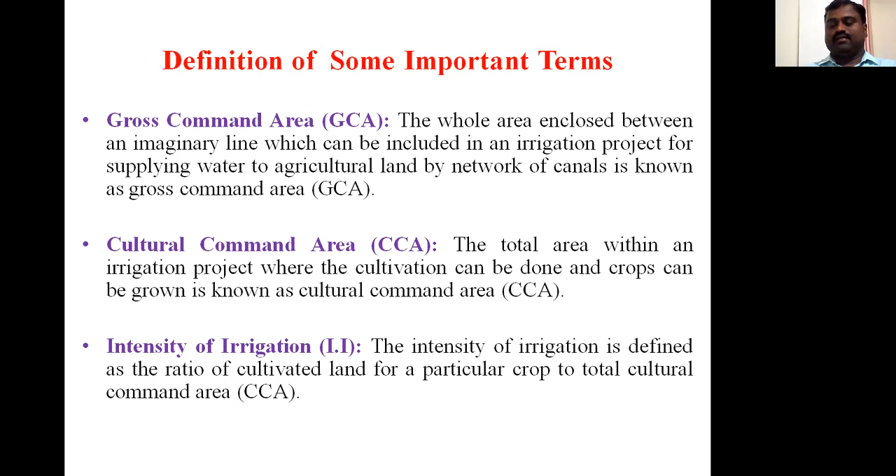Moving to next term, that is the time factor. This is the ratio between the number of days the canal has actually been kept open to the number of days the canal was designed to remain open during the base period. So when a canal is designed, basically it is designed to keep open for some days to supply water to agricultural fields during the base period. But practically, it is not kept open for the designed period. So this time factor is the ratio between the number of days the canal has actually been kept open to the number of days the canal was designed to remain open during the base period.

Last term we are having is crop factor or crop ratio. We have two seasons. One is Rabi season, other is the Kharif season. So this crop ratio is the ratio between area of land irrigated in Rabi season to the area of land irrigated in Kharif season. So these are some definitions of important terms.

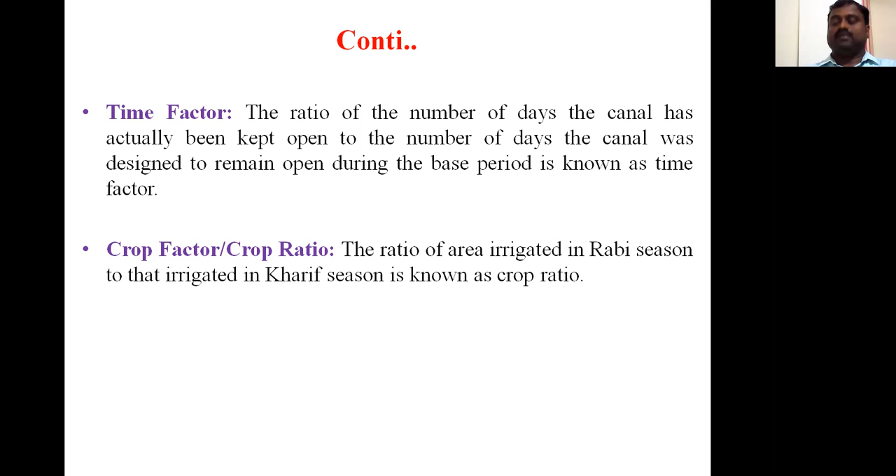Now let us move to next part, that is unlined and lined canals. Regarding these two types of canals, we already had gone through them in session 1 in case of canal types. So let us take again unlined and lined canals here. Unlined canal is a canal which is constructed without the impervious thick layer on the channel bed and the sides or banks. So therefore, in unlined canals, more seepage loss can be expected. And these canals are generally constructed with natural sides, so they are designed with low velocity to protect the canal section from scouring.

Moving to lined canals, these are the canals provided with the thick impervious layer at the channel bed and banks. So in this canal type, seepage loss will reduce to some extent due to provision of the impervious layer. And such canals are designed with a higher velocity, giving reduction in the cross-sectional area, as the lining is provided at the bank and bed of the channel.

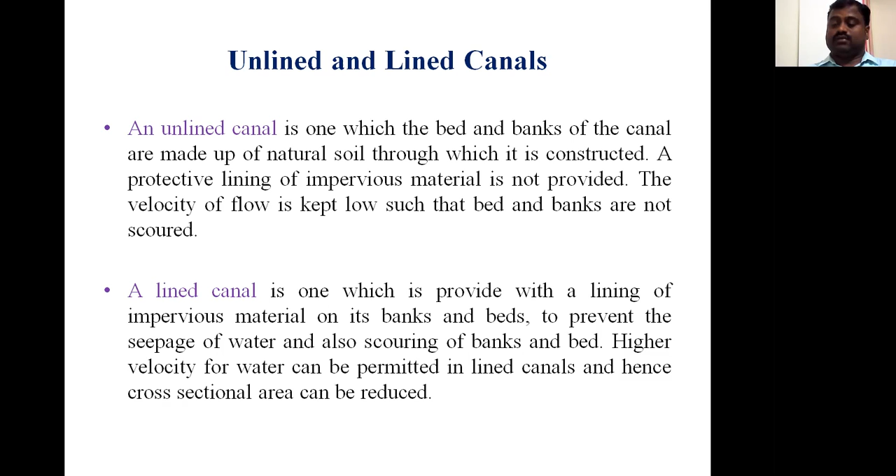Now let us move to design part. So let us take design of canals by Kennedy's theory. Kennedy basically selected canal section in the region called Upper Bari Doab, and his selected site was supposed to be flowing with the non-silting and non-scouring velocity.

And his study reveals that whenever the flow of water takes place through the channel section, the bed of the canal offers frictional resistance to the flow of water. And this is because of the generation of eddies. The eddies are generated due to frictional resistance between the flowing water and channel bed. So eddy generation takes place both in vertical direction as well as in horizontal direction from the channel sides.

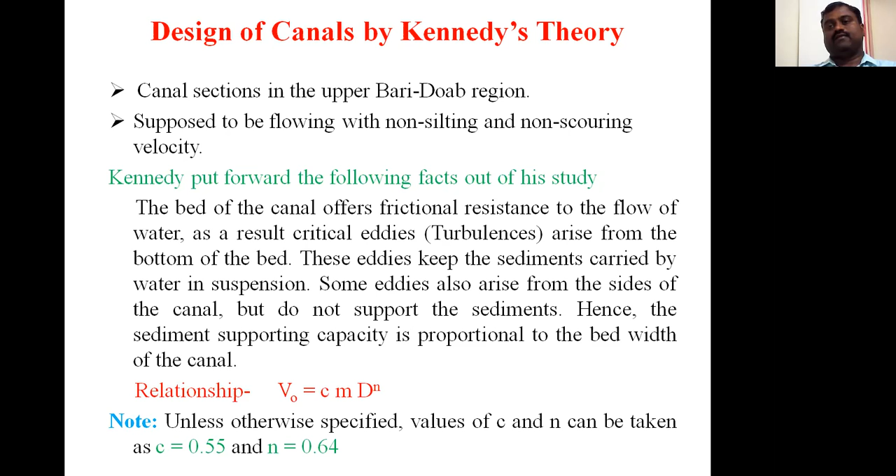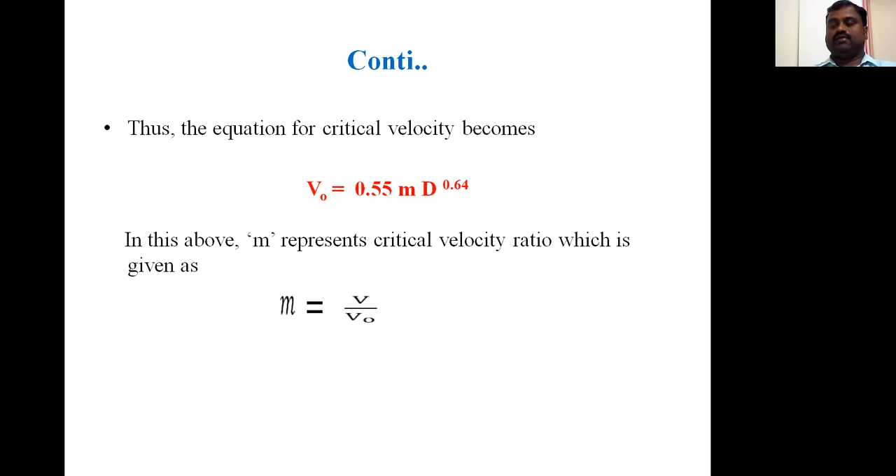Finally, the equation for critical velocity, after considering C equal to 0.55 and n equal to 0.64, becomes V naught is equal to 0.55 m into D to the power 0.64, where small m represents the critical velocity ratio, which is given by m is equal to V divided by V naught. So V here represents the mean velocity of flow, and V naught represents the critical velocity.

Kennedy used Kutter's equation to calculate the mean velocity of flow, that is V is equal to C root RS, where C remains a constant term, which is equal to 23 plus 1 by N plus 0.0015 divided by S, whole divided by 1 plus (23 plus 0.0015 divided by S) into N divided by root R. So in the equation V is equal to C root RS, C is a constant term, R represents the hydraulic radius, and S stands for bed slope of the channel.

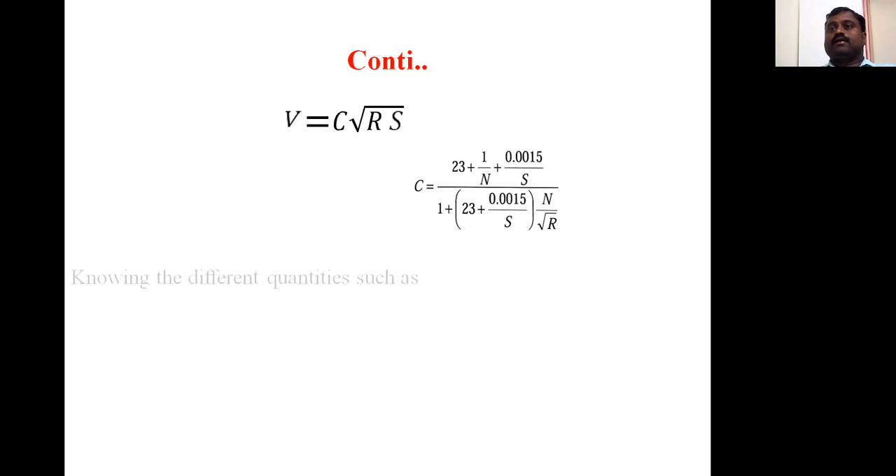And in the constant C expression, N is called the roughness coefficient or rugosity coefficient, S stands for bed slope of the channel, and R is the hydraulic radius. Now, knowing different quantities such as rate of flow and roughness coefficient, if the N value is assigned, the same value is considered for canal design. If not, the value of N is most of the time assumed as equal to 0.0225.

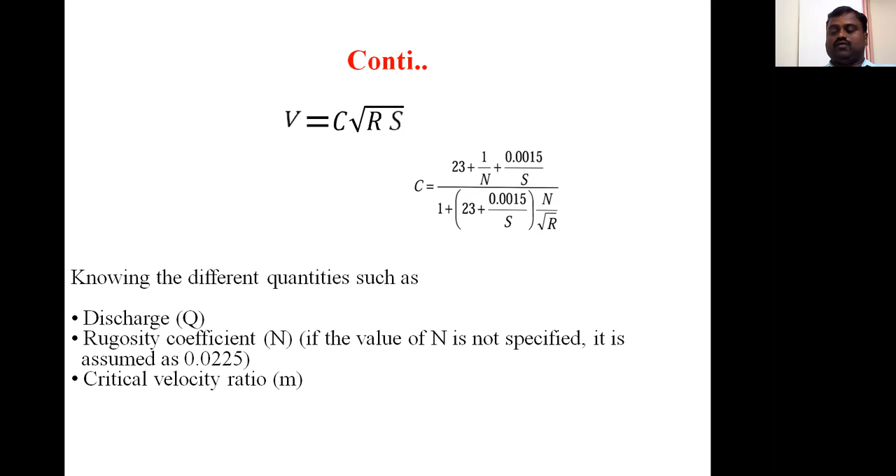Critical velocity ratio m is equal to mean velocity divided by critical velocity, and the bed slope S or B by D ratio. So knowing all these quantities, a canal design is done, determining the hydraulic mean radius, mean velocity of flow, as well as determining the channel dimensions.

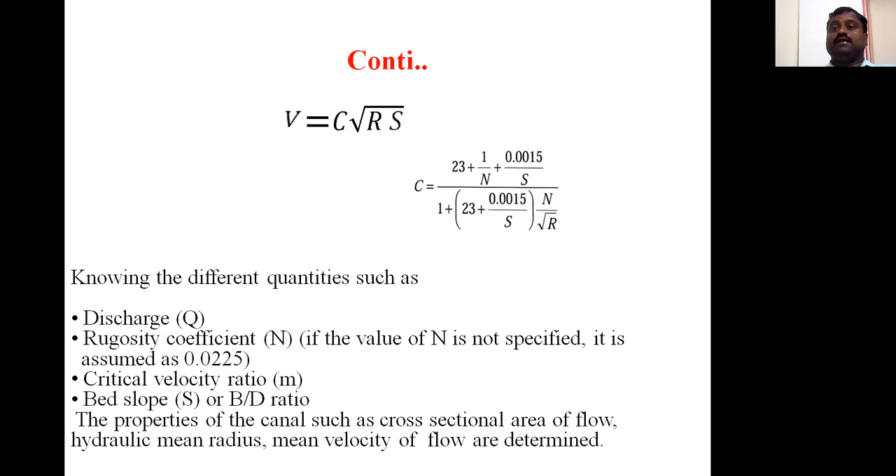So now let us take case one type canal design, which includes the value of bed slope. So case one type problem, when bed slope S is given along with the discharge Q value. So when the value of discharge Q and bed slope S is given, the following steps are followed to design the channel.

So in the very beginning step, that is in first step, the trial value of depth of flow is assumed for case one problems when discharge Q and bed slope S is given. So in the first step, assume trial value of D, that is depth of flow.

In second step, calculate critical velocity V naught is equal to 0.55 m into D to the power 0.64. So assuming depth of flow D value and substituting the same in critical velocity equation, in step 2, calculate V naught, that is critical velocity value.

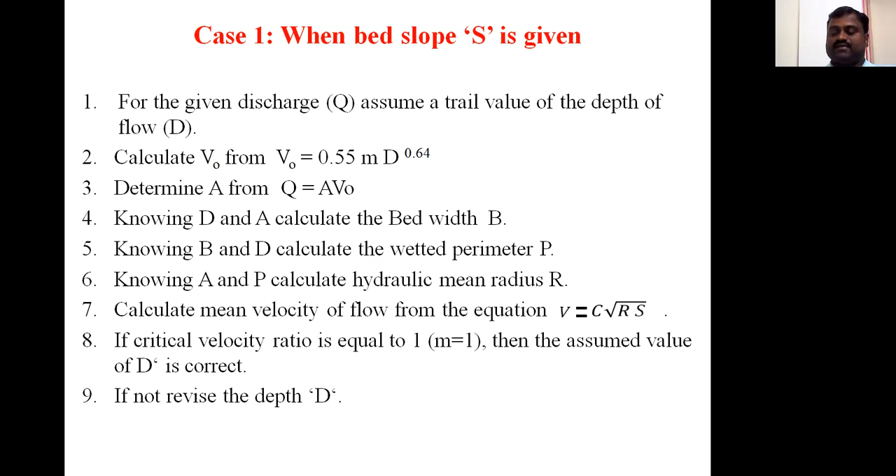Now, to understand in detail, let us consider an example. In this problem, the definition is: design and sketch an irrigation channel to carry 5 cumecs. The channel is to be laid on a slope of 0.2 meter per kilometer. Assume n is equal to 0.025, it should be 0.0225, and m is equal to 1.

Now we have to implement the design steps here. In the problem definition, we have the discharge Q value equal to 5 units and bed slope S value equal to 0.2 meter per kilometer. Along with these, we have the roughness coefficient value n equal to 0.0225 and m equal to 1. Now in the first step, we assume the trial value of depth of flow. So let us assume depth of flow d is equal to 1 meter.

Now from Kennedy's equation, critical velocity V naught is equal to 0.55 m into d to the power of 0.64. Substituting the values of m and d, V naught results equal to 0.55. In the third step, from the discharge formula Q is equal to area into velocity, area results equal to Q divided by V; discharge Q is given as 5, critical velocity is 0.55, so that equals 9.09 meters square.

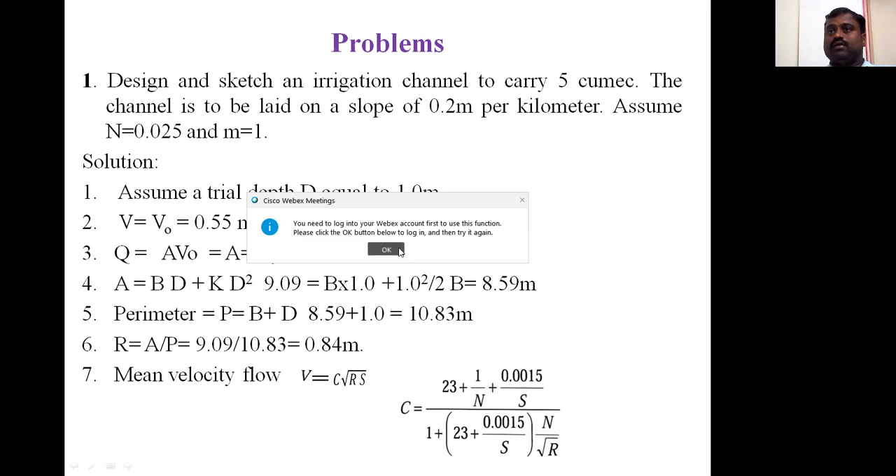And in the 7th step, from Kutter's equation, the mean velocity of flow is equal to C root RS. Before we calculate mean velocity, we need to calculate the value of C. In the C term, we have the rugosity coefficient n and the bed slope S. Substituting the n value and S value, C results equal to 42.85.

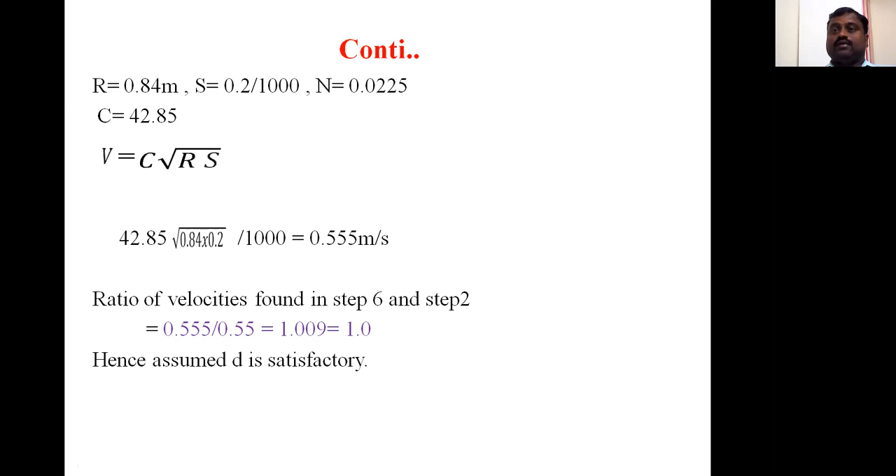And finally, after substituting the R value, S value and C value, V results equal to 0.555 meter per second. Now taking the ratio of velocities, m results equal to 1. Hence, the assumed trial value of D is correct. If it results incorrect, then we need to revise the design steps.

So, this is what we have in today's session. The remaining part of the canal design we will take in the next session.